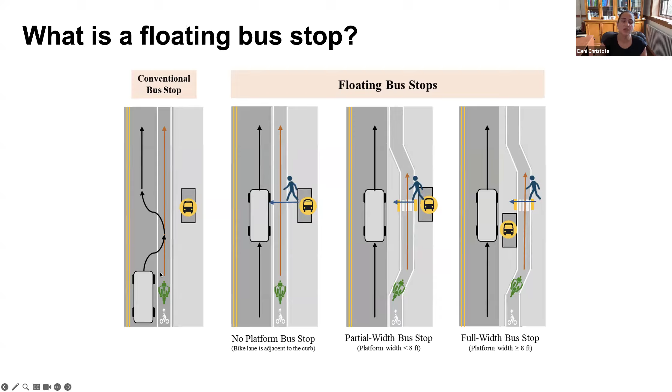So what are some advantages of this? Obviously we provide a protected space for bicyclists to be able to navigate and go from place to place, and it eliminates the conflict that the bus might have with a bicyclist as they're trying to approach the curb space to load and unload transit users.

However, it introduces conflicts between bicyclists and bus riders, who now have to cross this bike lane to get to the platform, or in the absence of a platform, have to cross the bike lane to board and alight from the bus.

It also creates concerns, particularly for individuals with disabilities, especially visually impaired transit users and wheelchair users, because the visually impaired have to navigate crossing this active bike lane without the ability to see well whether a bicyclist is coming or not.

Bicycles are also very quiet compared to motorized traffic, so it makes it very hard for them to be able to cross safely. For those using wheelchairs, it is harder to navigate narrow spaces on platforms if they're not designed properly.

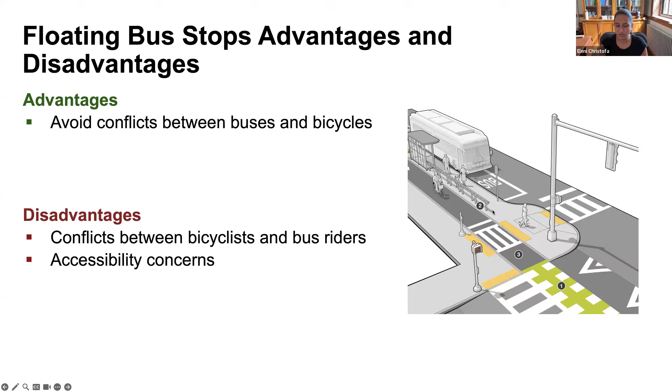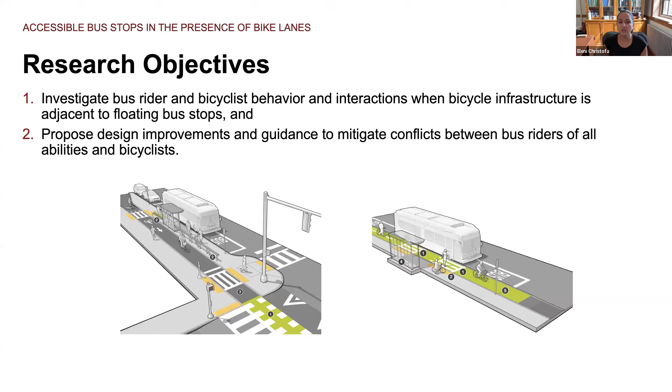So what we wanted to do in this project is look at how bicyclists and transit riders behave at these types of bus stops, and propose design improvements and guidance on signage and other elements that could make these bus stops safer for everybody and ensure access for all users.

So how we went about it: we started by reviewing relevant publications. We looked at various different bus stop design guidelines across the country, but also abroad to the extent that they were published in English and we could review them.

We summarized those, and we saw a lot of variability in terms of how these floating bus stops are named and how they're designed, including what is considered a full width bus stop. Sometimes those dimensions varied from agency to agency.

And then we did community outreach by organizing 3 focus groups. We had a total of 21 participants in the summer of 2023. The majority of those participants were from the visually impaired community, and there were a few who were hearing impaired and wheelchair users.

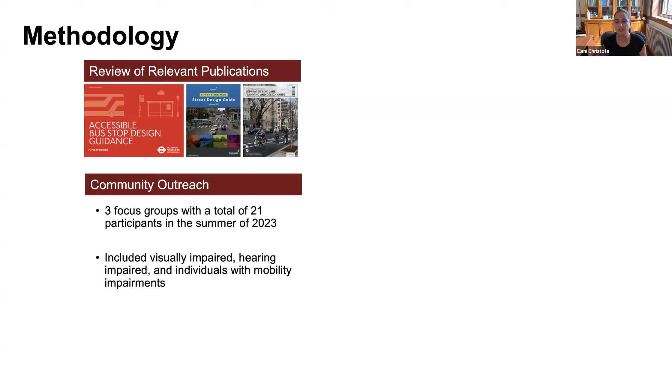We were able to obtain information about those individuals' experiences. Most of them were from the Boston area, where we ended up collecting the field data as well. So we were able to get the lived experiences of those individuals and understand a little bit better the challenges they're facing when navigating those floating bus stops.

In addition to that, we engaged with professional organizations. One of them answered our questions about their experiences and how these are being designed in other places. We also had interviews with professionals who have been involved in designing floating bus stops, and with cities that seem to be a bit ahead of the game in terms of how these bus stops are being designed and what elements they're considering.

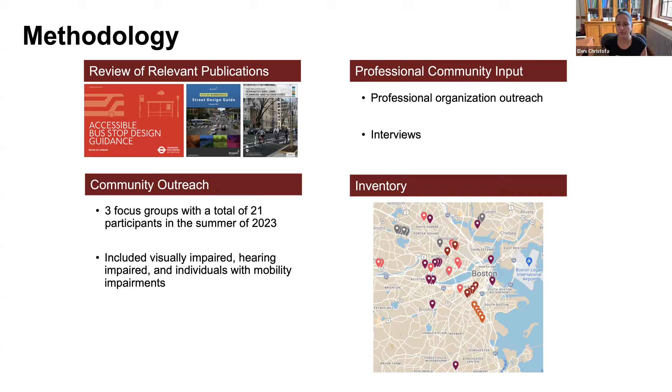Another aspect of this work is creating an inventory of the locations and characteristics of those floating bus stops for the MBTA service area. MBTA is the Massachusetts Bay Transportation Authority, essentially the transit agency for the greater Boston area. So we created an inventory with their input on the various floating bus stops and the types of those, along with other characteristics they have.

For the behavioral analysis, which focused on understanding how transit users and bicyclists behave as they are navigating these floating bus stops, we collected data using LiDAR devices and cameras at 5 bus stops in the greater Boston area.

So you see here how they're mapped around Boston and their locations around Boston. The color scheme indicates whether they're a full width platform, a partial width platform, or a no platform floating bus stop. And we collected a total of 36.5 hours of video and LiDAR data collection.

The LiDAR data collection allowed us to process trajectories of bicyclists and pedestrians and understand how they interact, but also extract information about their behavior at these different floating bus stops. The video could be used for confirming some of those behaviors and observing other behaviors that were of interest.

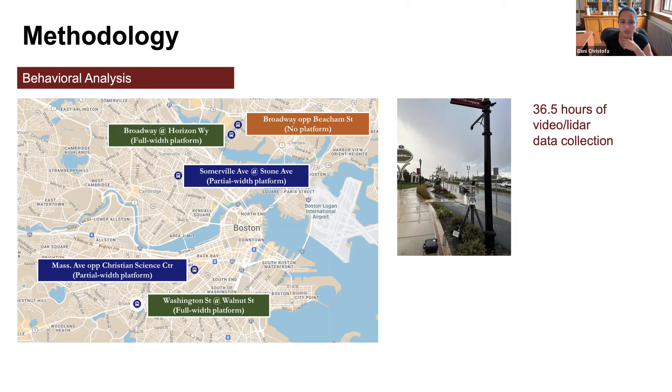We started with the video data, analyzing the video data. Essentially, looking at transit users as they were boarding and alighting from buses, we were trying to extract whether they were looking before crossing the bike lane or not looking. Obviously in some cases we could not tell, depending on the angle and where the bus was stopping.

So what we found is that for full width platforms, there was a higher likelihood of transit users looking before crossing. And as you can see from these bar charts, the percentage of transit users that was looking was higher for boarding passengers than for alighting.

Often people, when they alight, they just assume that they're immediately on the sidewalk. So I guess that's why those percentages were lower compared to when they were boarding the bus.

For the partial width platforms, we observed frequent crosses of the bike path while waiting, which could be attributed to the fact that partial width platforms often have the shelter on the sidewalk. So transit users, if they want to use the shelter and the bench, are waiting on the sidewalk side. Therefore, when the bus arrives, they have to cross fast to make it to the platform and board the bus.

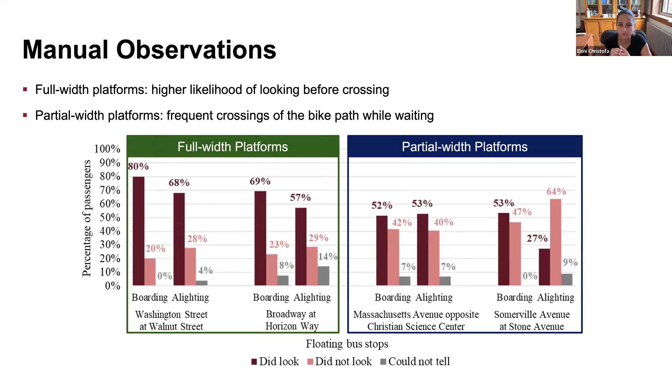So that's why we saw fewer glances, but also more frequent crossings of the bike path.

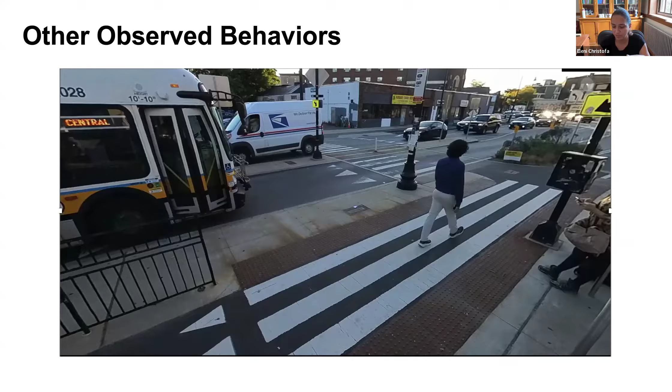What we observed is that individuals on those longer crosswalks would just enter and then walk diagonally to get to the sidewalk. So they extended the amount of time transit users would spend walking within the bike lane, which could be introducing additional conflicts.

Oh, it's going on now. Okay.

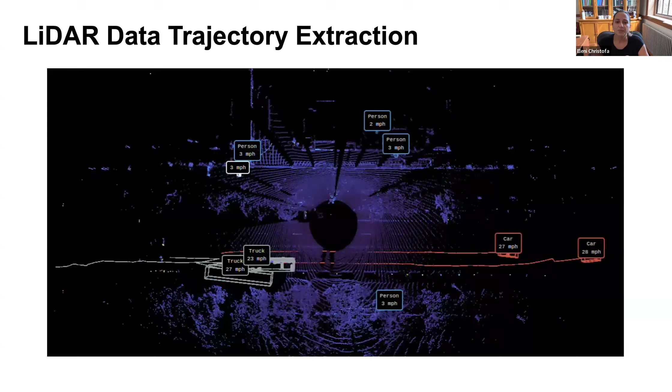So we used that information to answer a few different types of questions. Some of them were related to the infrastructure and bicycle speed. So how does how we design these floating bus stops affect how fast bicyclists are traveling through those bus stops?

We looked at two specific design elements. One was the horizontal curves - if the bike lane deviates a little, has a deflection as you're entering the floating bus stop area, does it reduce bicyclist speed? And the fencing you might have seen on some floating bus stops - we hypothesized that could also be reducing bicyclist speed, by making bicyclists more aware that there's a bus stop there and there might be people crossing. So we investigated these two design elements in terms of bicycle speed.

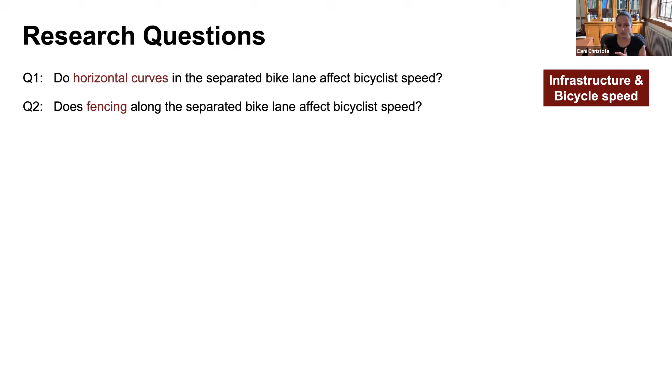Then we looked at passenger behavior. That had to do with tracking pedestrians and looking at whether they stand in the separated bike lane, how long they spend there, do they go back and forth from the sidewalk to the platform and back, and how many of them are using crosswalks versus other parts of the bike lane to cross to the platform, or to cross to board and alight.

And also, how many passengers walk across the separated bike path? So it's not only about crossing it to get to the platform, but in some cases we observed individuals just walking across along the protected bike lane. Lastly, we're interested in understanding the interactions between bicyclists and transit users, or more generally pedestrians. I'm making this distinction because, as you might imagine, it was not possible for us from the trajectories to understand if a person was necessarily a transit user or not.

So we call them pedestrians as a group. We're interested in seeing when a pedestrian is standing on the bike lane and a bicyclist is approaching, how much clearance do they allow between them and the pedestrian, and do they actually adjust their speeds, especially when there's no platform at those floating bus stops.

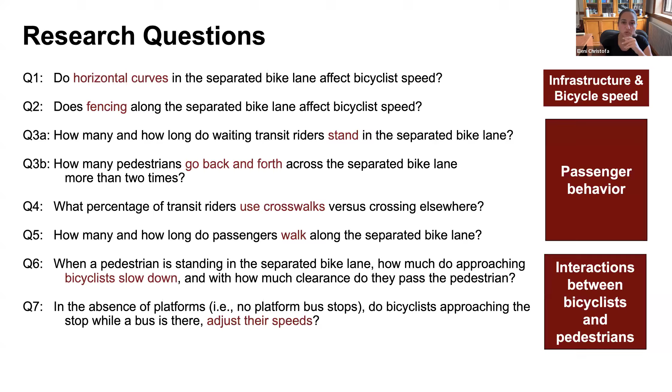However, what we observed was that bicyclists traveling at higher speeds, within our sample size, were more likely to reduce their speed more. So what this tells us is that maybe overall we don't really reduce the average speed by much, but maybe we bring the highest speeds we observed lower, therefore hopefully improving safety.

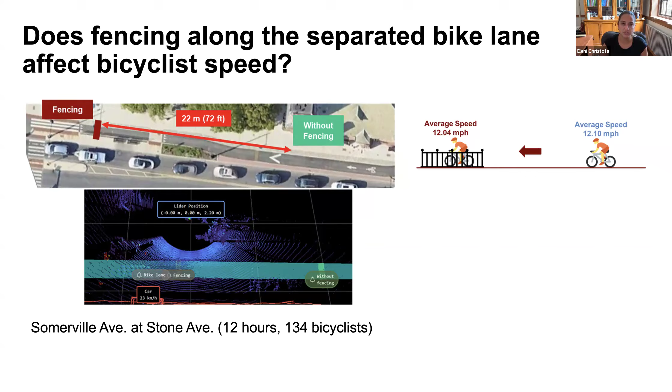Then we looked at the percentage of transit riders that use crosswalks versus crossing elsewhere. How we defined crossing pedestrians was we extracted trajectories that were perpendicular to the bike lane, assuming that's the path they would follow to cross, and they were crossing the bike lane at a speed of more than 1.5 miles per hour.

So even though we didn't find that fencing significantly reduces bicyclist speeds, it does at least improve safety in many ways by concentrating pedestrians to cross at specific locations of the bike lane that hopefully are more visible to bicyclists due to the pavement marking of the crosswalk at those locations.

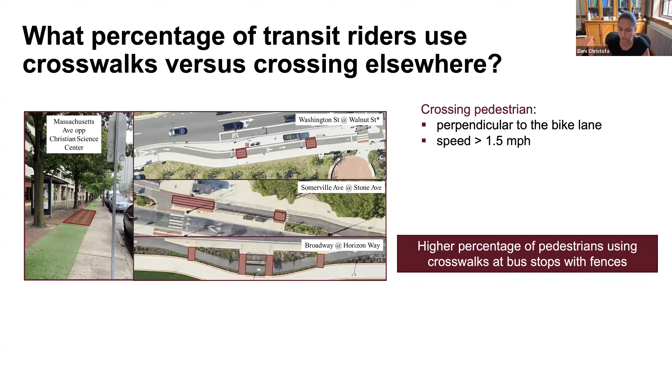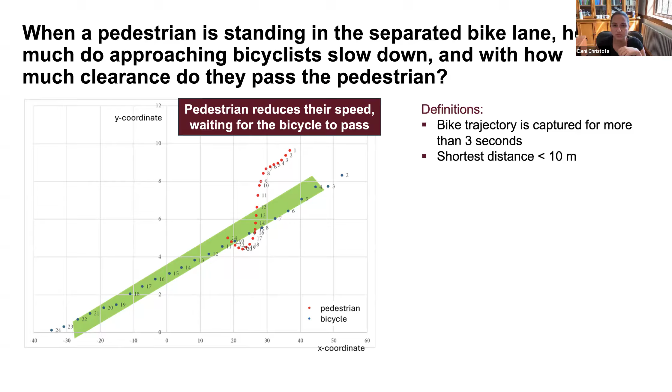So out of this whole study, we were able to provide some recommendations. Please note that these recommendations didn't come out of just the behavior analysis I presented in detail, but had input from the focus groups we did, the professional organization outreach, the interviews we did with cities, and the guidelines we reviewed, both US-based ones and international ones. So we put all this together.

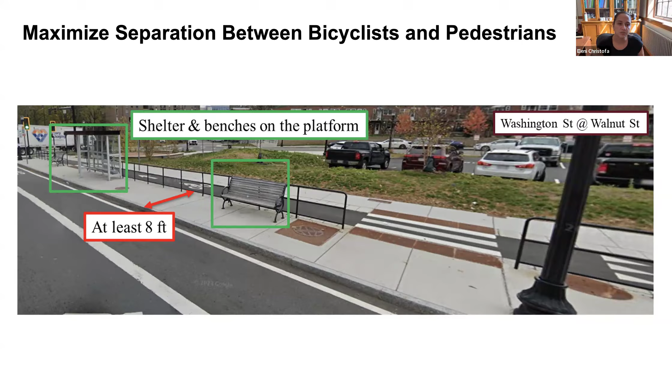Essentially, we had recommendations under three sections. The first one was to maximize separation between bicyclists and pedestrians. How do you do that? By designing your platforms to be at least 8 feet, the so-called full width floating bus stops. That will also enable you to have enough space to locate shelters and benches on the platform.

If this is not possible due to space constraints, you can convert a partial-width to full-width platform by narrowing the bike lane at the bus stop location, or moving the shelter from the sidewalk to the platform. Even though this keeps the platform narrower, which could create issues for wheelchair users navigating it, it allows people to wait at the platform rather than rushing to cross the bike lane when the bus stops.

Installing fencing can encourage individuals to use the crosswalks. It's also important to use different pavement materials to improve situational awareness for all users around the bus stop, so they can detect and differentiate between where the sidewalk is, where the crosswalk is, where the bike lane is, and so forth.

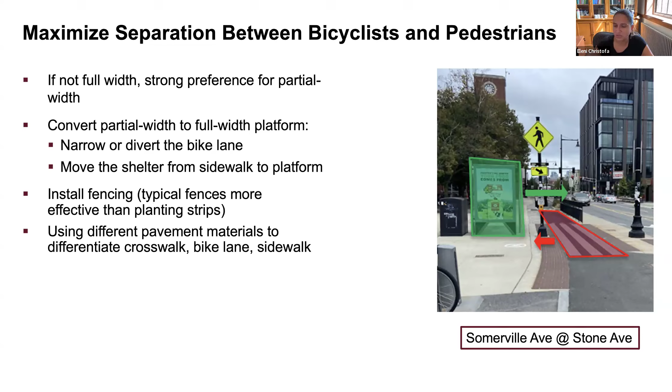In general, and this was a big part of the focus group discussion, floating bus stops without a platform should be avoided. We also discovered that other cities around the world have laws dictating that bicyclists should not pass and should yield to transit users when passing through a bus stop.

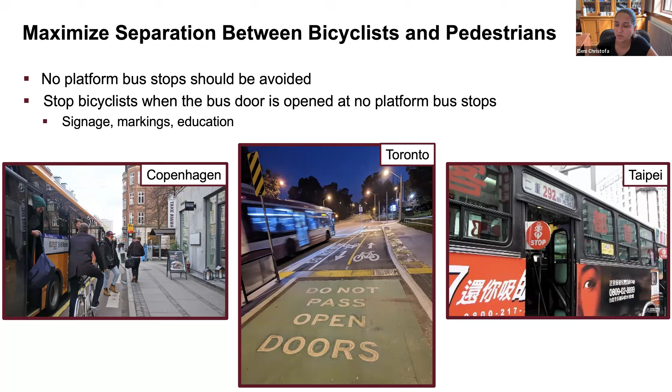You see here a bicyclist stopped in Copenhagen as the bus is alighting passengers. You see pavement markings in Toronto indicating that you're not allowed to pass when the bus is actively boarding and alighting passengers. And in Taipei, Taiwan, buses have this bus stop sign similar to what school buses in the States have, indicating you're not allowed to pass a bus that is actively boarding and alighting passengers.

Another recommendation is speed management for bicyclists, achieved through horizontal deflection—changing the curvature of the bike lane, hoping to cause bicyclists to reduce their speeds—or vertical deflection, a slight elevation that would motivate bicyclists to slow down.

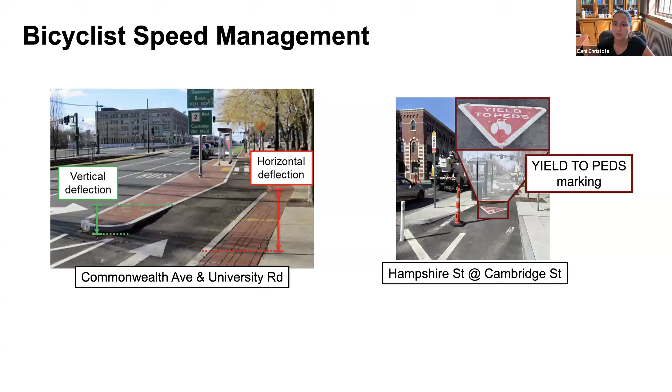Last but not least, as I mentioned at the beginning, we worked with the Department of Accessibility of MBTA to understand what challenges floating bus stops introduce for individuals with disabilities, especially those with visual impairments. Recommendations from the study were to align the crosswalk, tactile pavement, and boarding area in a straight line, which eliminates much of the need for navigating complex situations, so transit users can just walk straight to where they'll board the bus.

Marking the locations of crosswalks by installing a flex post indicative of a bus stop makes it easier for individuals with visual impairments to detect that. In general, the goal is to make navigation from the curb to the bus as smooth and as easily detectable as possible.

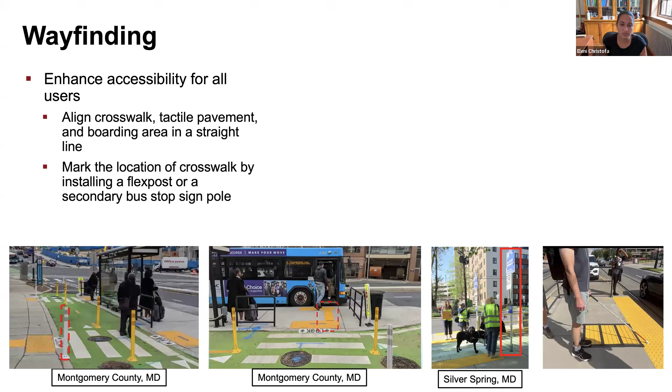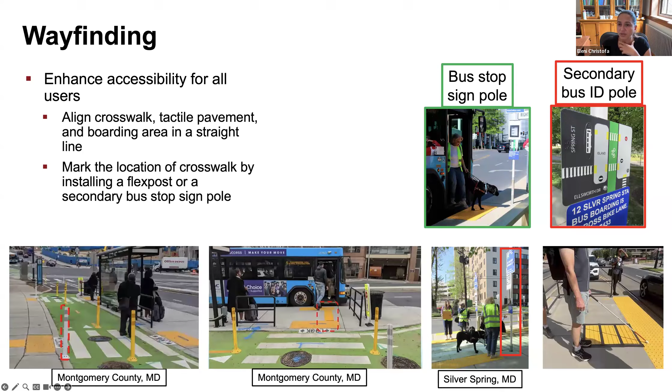Here are some examples. In certain places, different types of tactile pavement are installed exactly where the bus stops, as an indication of where to wait to board the bus. They also have secondary bus ID poles in Braille, so people can read that with their hands.

As I mentioned at the beginning, I've been working in this space for more than 10 years now. So far, the tools we have used to assess safety, especially bicyclist safety as it pertains to the design of our infrastructure system, has been done mostly through driving simulator experiments. We're using eye tracking to observe where drivers are looking and see if they're able to detect bicyclists or detect the bicycle infrastructure we have in place.

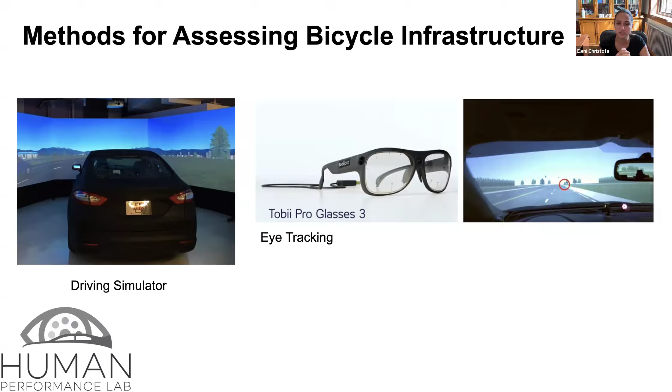Recently, we have also been working on building a bike simulator. We're really close to having it actually up and running. That would allow us to not only observe driver behavior as it pertains to their interactions with bicyclists, but also bicyclist behavior when we introduce them to different types of design elements.

Last but not least, a lot of my work is out in the field, which is great because that's where you get the actual real world behavior. So we've been doing data collections for many years with radar devices, video cameras, but also more recently LiDAR devices.

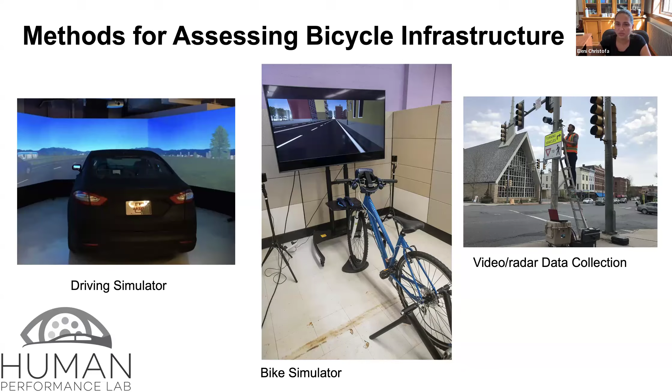So we're able to see how drivers behave around these treatments. Granted, some of these treatments, like the bike box, at that point, almost 10 years ago now, were not very common in Massachusetts. So we were also interested in seeing, can drivers that are not familiar with these types of infrastructure treatments actually understand what they mean and behave as expected?

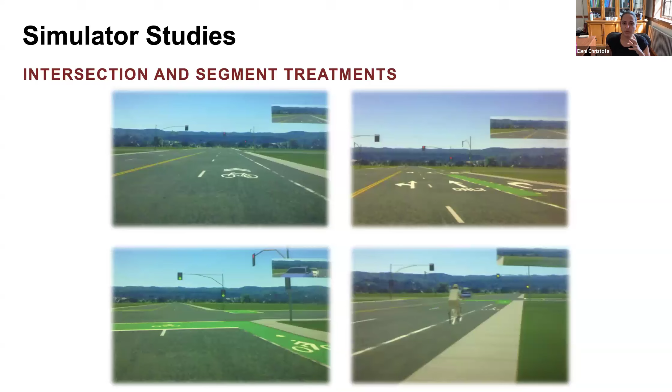We moved on with this work by adding combinations of treatments, a mix of intersection treatments and link segment level treatments. So we looked at what the driver behavior is like if we have bicyclists coming from a conventional bike lane into a protected intersection or into a non-protected intersection, versus a protected bike lane coming into a protected intersection or unprotected.

This was motivated by the fact that some research has shown that when we have protected bike lanes, the bicyclists are kind of removed away from the travel lanes. Therefore, when we arrive at an intersection, drivers are less aware of the presence or potential presence of bicyclists, and therefore they're less likely to scan the environment to detect them.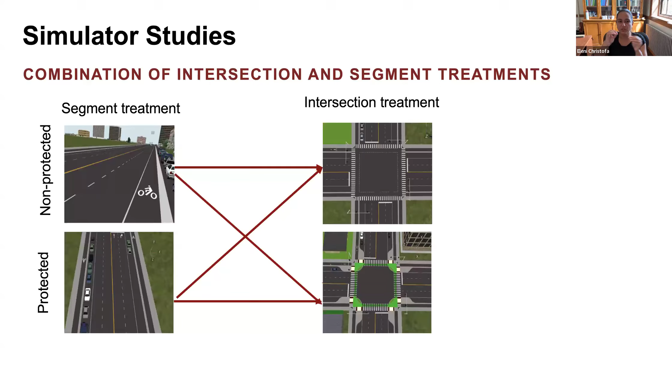So we're interested in seeing if the combination of intersection and segment treatments has an impact on driver behavior. We have expanded some of this work now to also look at comparison of driver behaviors when they're interacting with bicyclists versus e-scooters, again in the presence of some of these treatments.

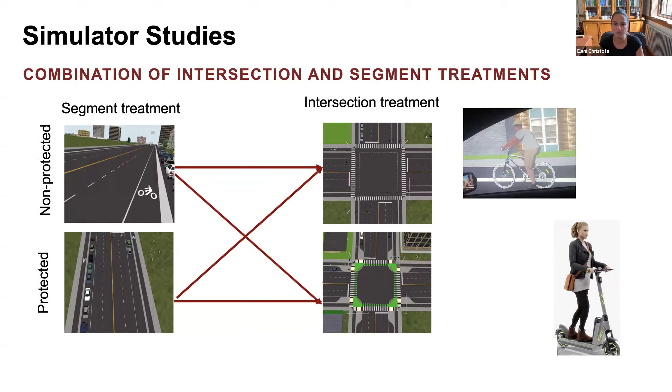Two of the studies I performed in the field, funded by the Massachusetts Department of Transportation, were related to understanding driver behavior and bicyclist behavior around bike boxes, which are rectangular spaces that bicyclists are expected to wait in as they're waiting for the green light to go through the intersection or perform any other maneuver at the intersection, and the two-stage turn boxes that facilitate left-turning movements by separating the left-turning movement of a bicyclist into two stages, as the name implies.

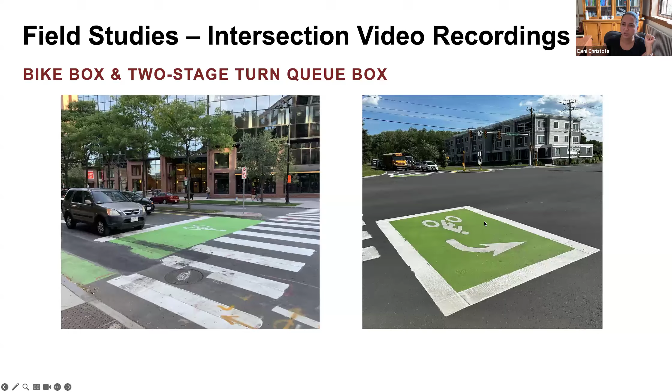So a bicyclist would go through and then wait at this two-stage turn box, and then complete their left-turning maneuver once the green light for this through direction is on.

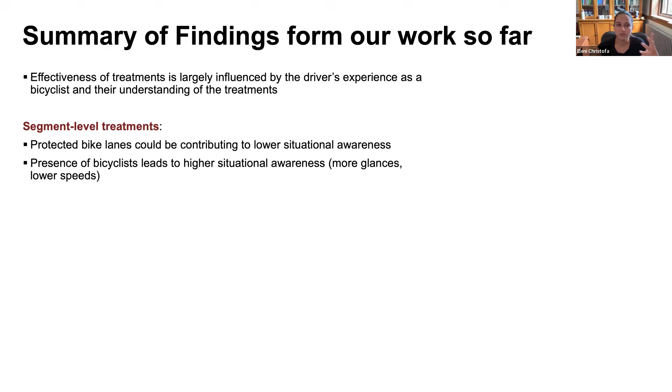The summary of findings from this work is that the effectiveness of these treatments is highly influenced by drivers' experience, both as a bicyclist, but also their understanding and familiarity with these treatments. In protected bike lanes, we found they could contribute to lower situational awareness, but the presence of bicyclists induced safer driver behavior — more glances, slower speeds. This speaks to the so-called safety in numbers phenomenon: the more bicyclists out there, the more likely drivers are to be aware of them and drive more safely.

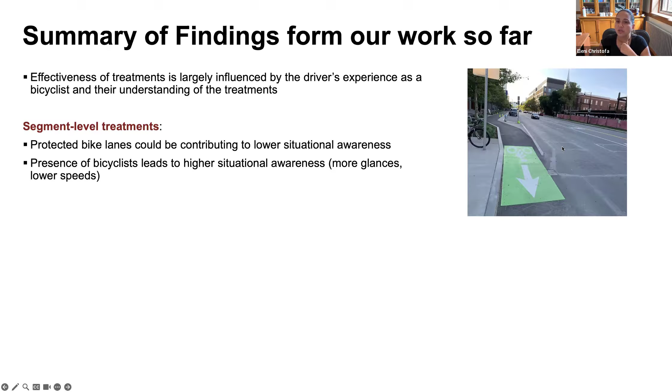This is an example of a design intervention you could make for a protected bike lane, to reintroduce it back with general traffic as you're approaching an intersection. You see this bike lane is not only curved, so it has a horizontal deflection, but it's also painted green — hopefully more visible to drivers, to again be more aware that bicyclists might be around.

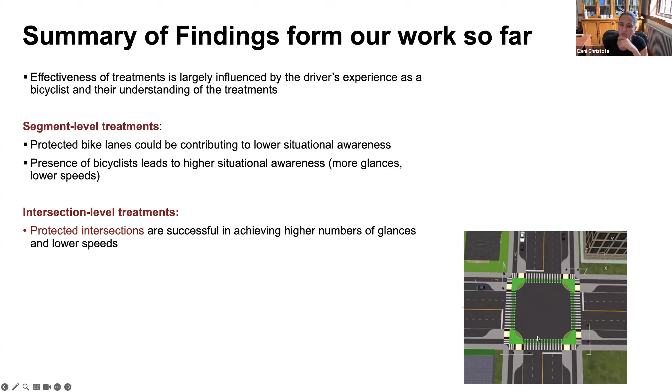When we looked at intersection level treatments, we found that protected intersections were successful in achieving a higher number of glances and lower speeds. That's because at protected intersections, drivers have to slow down and complete the right turning maneuver at a lower speed and further away, at a wider angle. Therefore, they're more likely to interact with a bicyclist in front of them rather than having to scan to the right or diagonally toward the back. So that makes these types of intersections safer.

When we looked at bike boxes, we found lower motorist compliance compared to previous studies. What we mean is when you approach a bike box as a driver, you're expected to stop behind the perimeter of that bike box. We saw that about 75% of participants were actually doing that, which is a higher compliance rate than what we observed in the real world, which was 60%.

We also observed that turning vehicles had statistically lower compliance rates compared to through-moving vehicles. The reason being, as you're completing a right turn, you probably want to be further ahead at the intersection, within the intersection, to have better visibility.

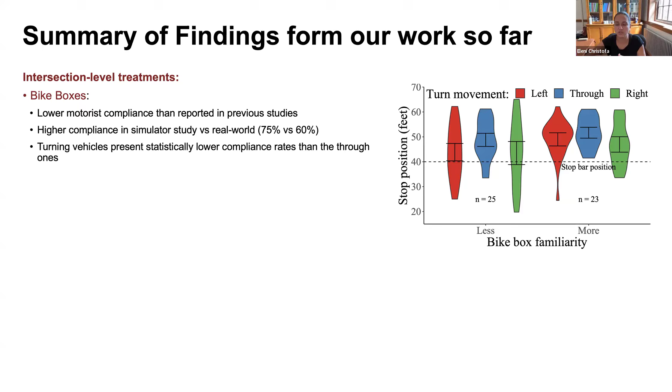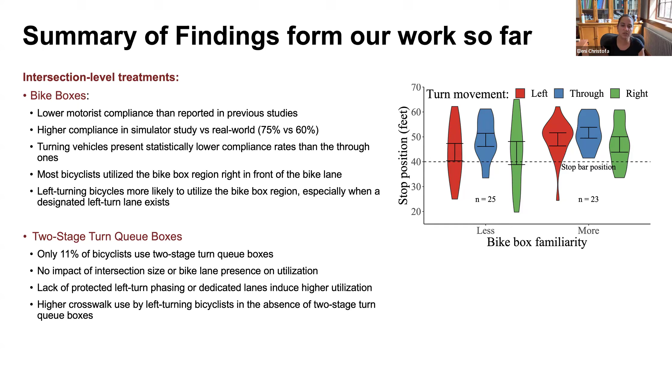For the two-stage turn-queue boxes, we saw very low utilization from bicyclists. We found no correlation between intersection size and bike lane presence on how many people actually use two-stage turn-queue boxes. We found that when we didn't have dedicated or protected left turn phases, we saw higher utilization — probably because that's when bicyclists feel more unsafe making a permissive left turning maneuver at the intersection, so they elect to use the two-stage turn-queue box. We also saw higher crosswalk use from left-turning bicyclists when there was not a two-stage turn-queue box present.

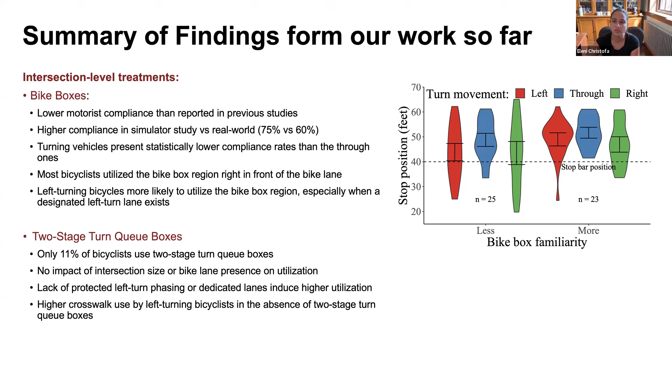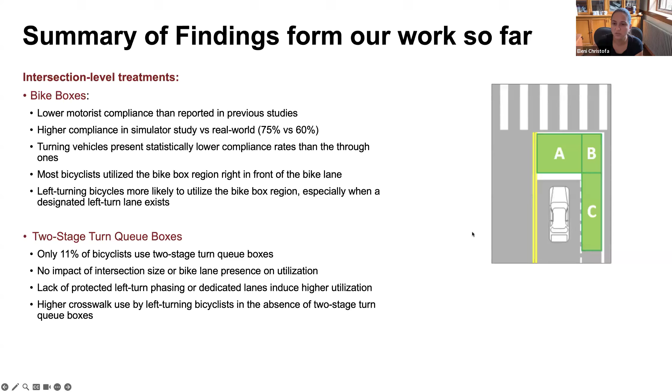Oh, I forgot I had these animations, apologies. So to indicate that, again, at the bike box, most bicyclists waited at area B or even C within the bike lane, and very few who wanted to turn left utilized the A space. Here is an example of a bicyclist using the two-stage turn-queue box properly: they came from here, stopped here, and waited for the green light to move through.

The objectives of this study with the drones were to collect data from a group of drones flying at the same time over a long stretch of an arterial segment, and use these trajectories to develop surrogate safety measures for bicyclists, correlating the crash risk we observe with the presence of different bicycle infrastructure treatments, and also their connectivity.

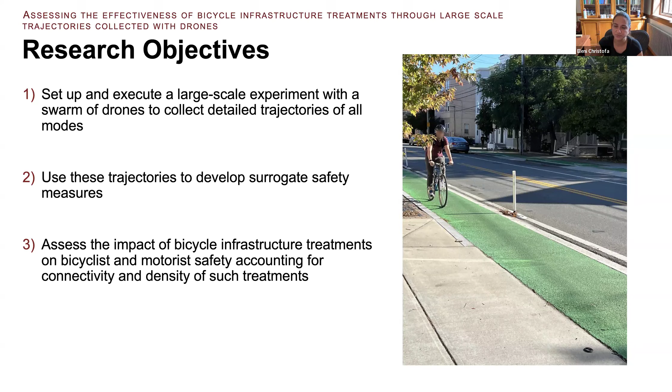So we selected a 0.35 mile segment of Beacon Street in Somerville, Massachusetts. This is a city very close to Boston, to the west of Boston, I guess.

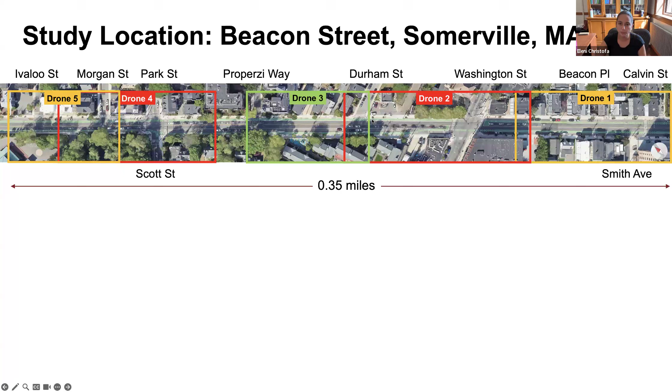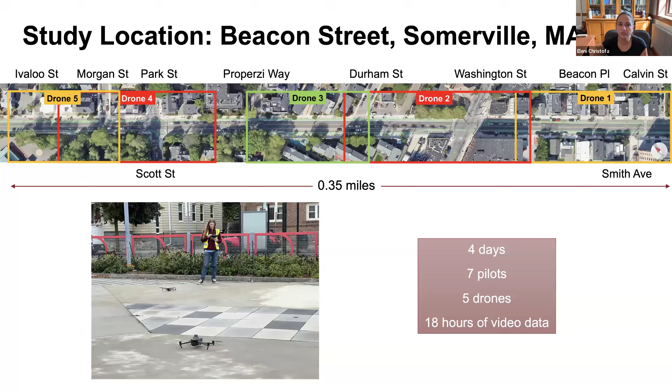We flew 5 drones — you see here the overlap of the drone imagery. The idea was that with overlap, we could trace the trajectories of both bicyclists and cars and observe them over longer parts of this signalized arterial. We were there for 4 days with 7 pilots and 5 drones, and we were able to collect a total of 18 hours of video data across that whole arterial segment.

The reason we selected this specific signalized arterial was that it presented a lot of different bike infrastructure treatments that would allow us to assess their impact on bicycle safety, but also on car safety.

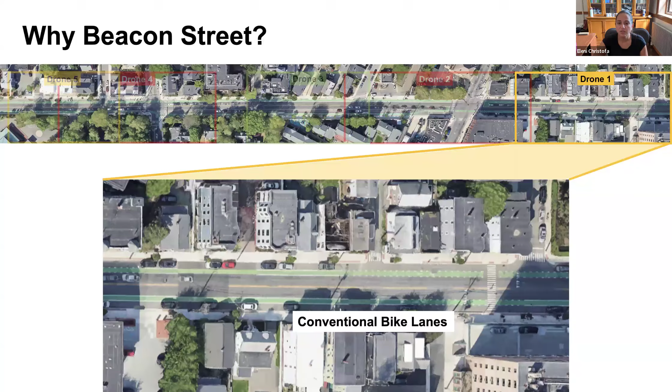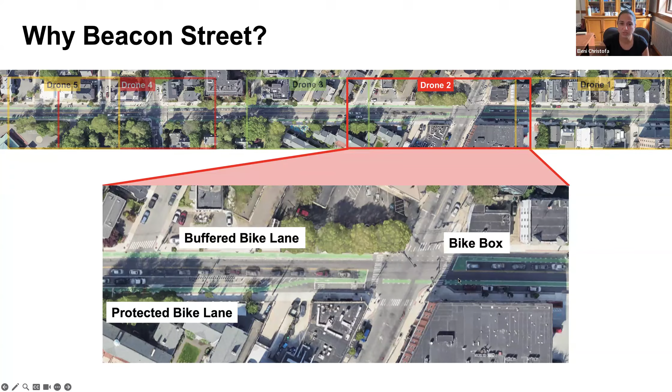We had conventional bike lanes on this part. We had a buffered bike lane, essentially a conventional bike lane but with bollards, so it has some level of separation, but not fully separated. We had protected or separated bike lanes, bike boxes, and other places with two-stage turn queue boxes. You see here an example of a bike box at one of the intersections.

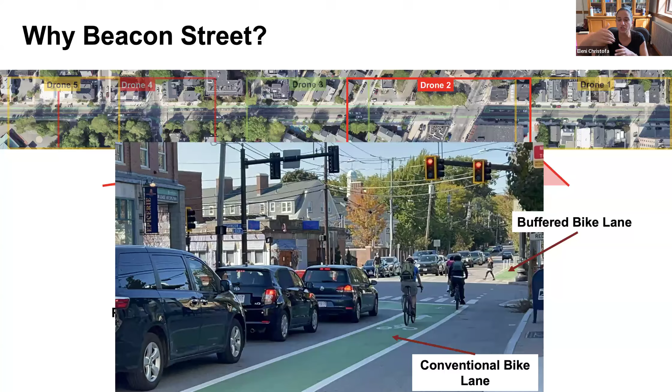Leading to the bike box from a conventional bike lane. Further down, there was a buffered bike lane. So again, we're able to assess behavior as these treatments change along the segment and also at the intersections.

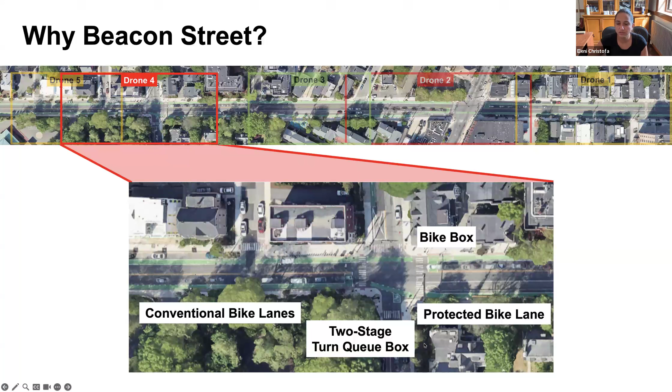For this middle drone, we had conventional bike lanes and protected bike lanes, and a two-stage turn queue box, another design treatment we're interested in studying. You see here how a conventional bike lane transitions to a protected one. There is a two-stage turn queue box here, so this is an image from the actual intersection, a bike box and a conventional bike lane again.

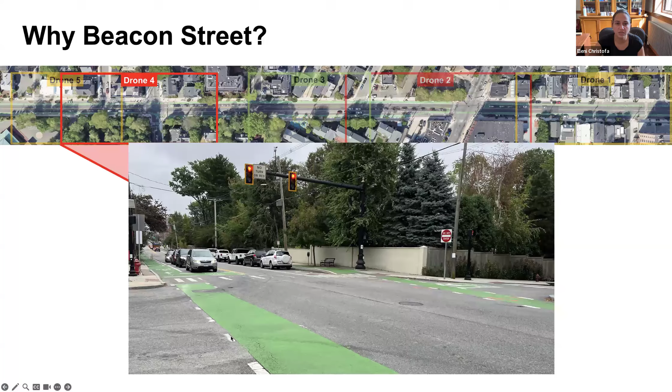Lastly, the last segment had just conventional bike lanes, which is great because we can use it almost as a control for the rest of the study as we assess the impact of the other types of treatments on bicyclist behavior and driver behavior.

So here is a schematic of the trajectories we're able to extract. I would be remiss if I didn't mention that we collaborated with a startup company in Switzerland called Mobilisis, who were able to process the video data and extract the trajectories for us.

And the process of analyzing trajectories, developing surrogate safety measures to be able to assess crash risk and other safety challenges that appear, and be able to present some recommendations about how these different designs should be implemented in the real world.

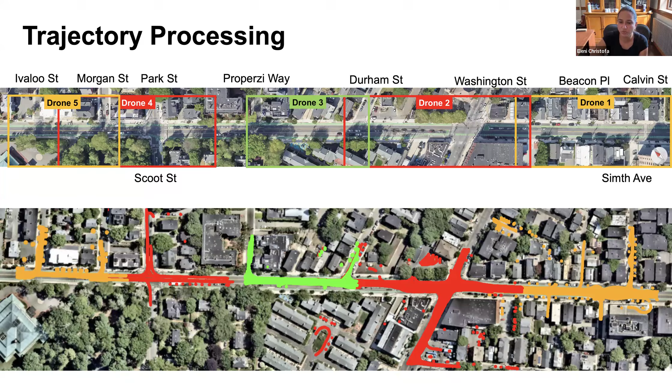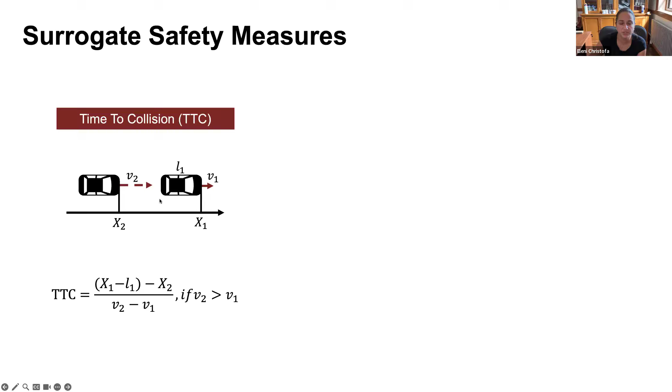The estimation of surrogate safety measures, we're targeting time to collision and post-encroachment time. As a review for those not familiar with these terms, time to collision is essentially the time it would take for a following vehicle to crash into the preceding vehicle if they do not change their trajectory or speed at all.

Post-encroachment time has to do with the time that elapses from the moment the vehicle is leaving the conflict area until the next vehicle is approaching that area. So obviously, the shorter these times, the higher the risk, and that's how we can assess crash risk.

This is particularly important for bicycle safety because, as I mentioned at the beginning of my presentation, we have underreporting of bicycle crashes. And obviously, we don't want to wait to see a bike crash to be able to go and analyze and see what might have been wrong.

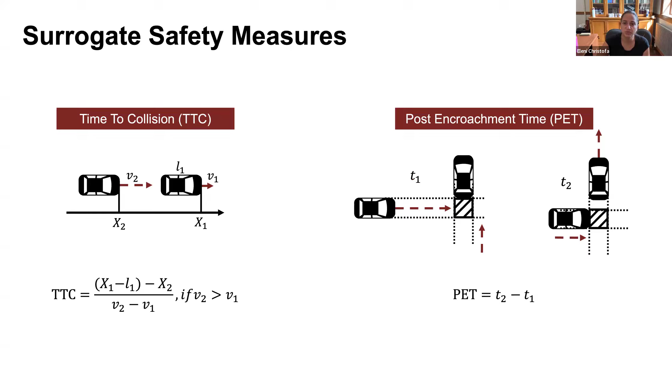So for the safety assessment, we have a few dependent variables, obviously the two surrogate safety measures, motorist speed, but also bicyclist speed. For independent variables, we'll use the type of infrastructure treatment, the continuity of the bike lane network, the intersection level treatment density, but also bicyclist and car demand, as well as roadway geometry, to understand how each of those factors might be influencing these dependent variables.

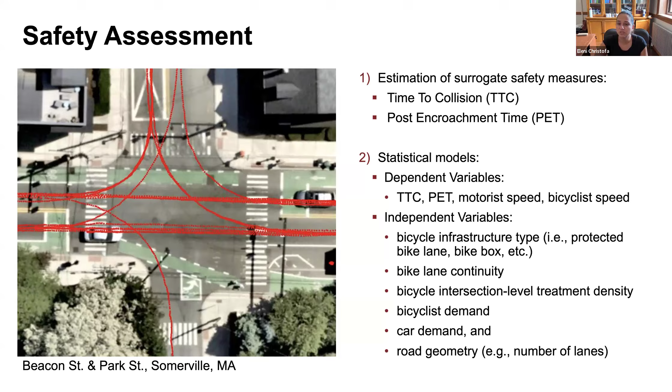This was funded by the New England UTC, in collaboration with Mobilisis and UMass Air, who helped us recruit pilots. You see them here flying the drones for many days. There were many early mornings we spent in Somerville last fall, and we're excited to analyze the trajectories and see where that goes. The lead student on this project is my PhD student, Thomas.

So that concludes my presentation. Hopefully I'm within time, and I'm happy to answer any questions or discuss any topic you might find interesting related to this work. Thanks again.